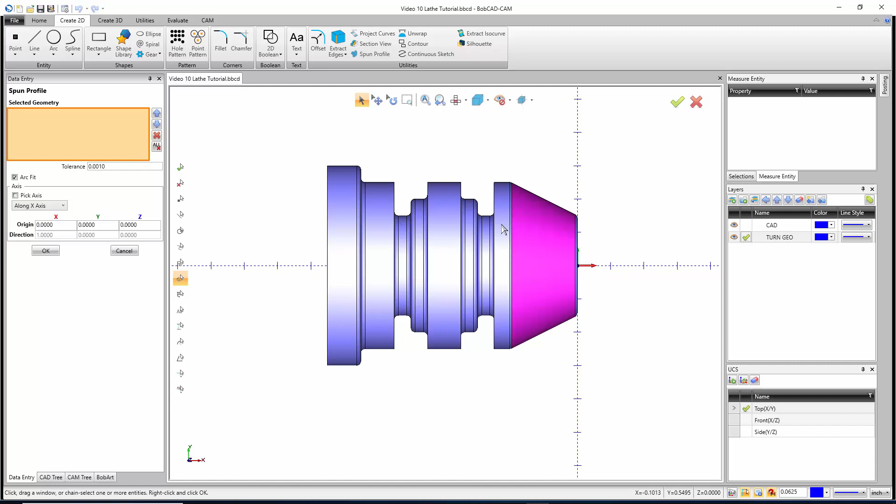Now, if you are just turning, so you don't think with the coordinates of X, Y, Z, and you think of it more as X and Z, under the Home tab here, you can turn on turning mode. And what you'll see is down here at the bottom, the screen will change to Z and X instead of X, Y. So that's a good way of just keeping it in turning mode so you're always thinking with your Z and your X properly.

I like to just leave it off because most of the stuff I do, I'm just drawing it in the XY plane, and when I machine it, it'll all be in the XZ plane anyway. So for me, the center line of the part is along the x-axis. So I want to go along the X for my direction. The tolerance is the allowable deviation. So it's kind of the quality of the part, and I'm going to leave it right there at 0.001. And then the origin is XYZ 0, and I have my part centered right on that.

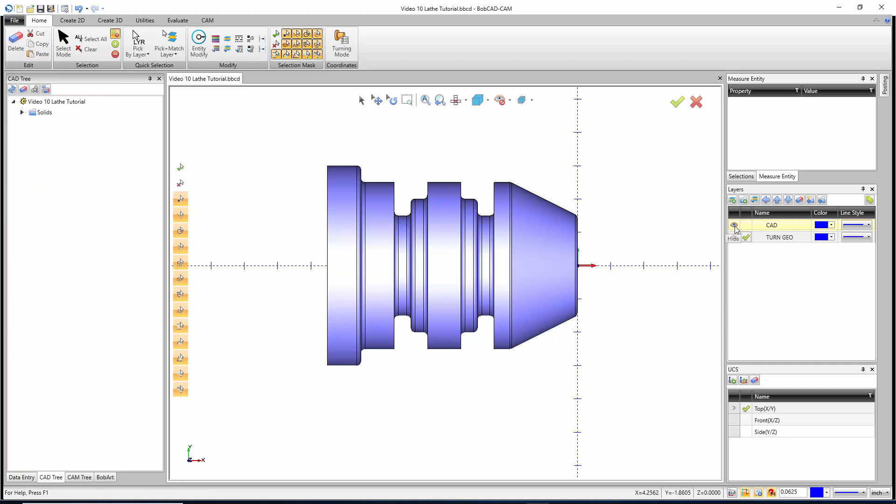So now all I have to do is drag a box over the whole part and then hit OK. And when I'm done, I can cancel out and then turn off the CAD layer over here. You're just going to click the eyeball, and I'm left with that geometry. So down the middle, we have a 1-inch hole, and then we have just some turn geometry and some grooves that we're going to have to cut in.

So I'm going to start by going to my CAM tree. I'm going to right-click on CAM defaults and say New Job. And from here, I'm just going to choose Turning, which will choose the BC2X lathe. And I'm going to go to the Stock Wizard. Now for the Stock Wizard, I'm just going to hit Next. And so the way I like to figure this out, it does not automatically calculate a size of stock. So what I do is I look at my XY position.

And if I bring my cursor to the back corner of the part, we can get a pretty good idea of how big this part is. So right here for X, we'll see it's 7.49. So it's about 7.5 inches long. And for Y, it's 3, but remember, this is just the radius. So the stock diameter is going to be closer to 6. So we'll say it's a 6-inch diameter, and we'll say that the length of it is 8.5 inches, just like that.

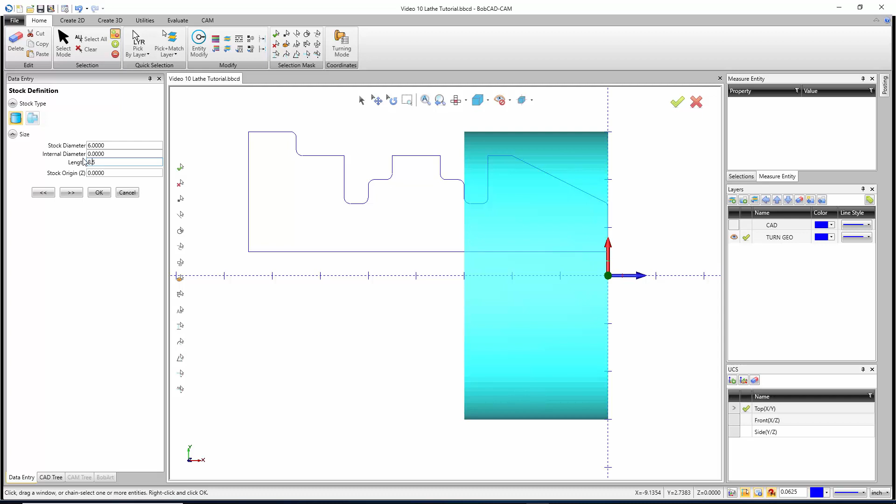Now, if we have material on the front face of the part that we want to take off, what we could do is right here where it says stock origin, we could put in, say, 0.1, and that's going to shift the whole stock forward. So it's still 8.5 inches long starting out, but we're going to take off that 100 thousandths and then be able to do the rest of our cuts.

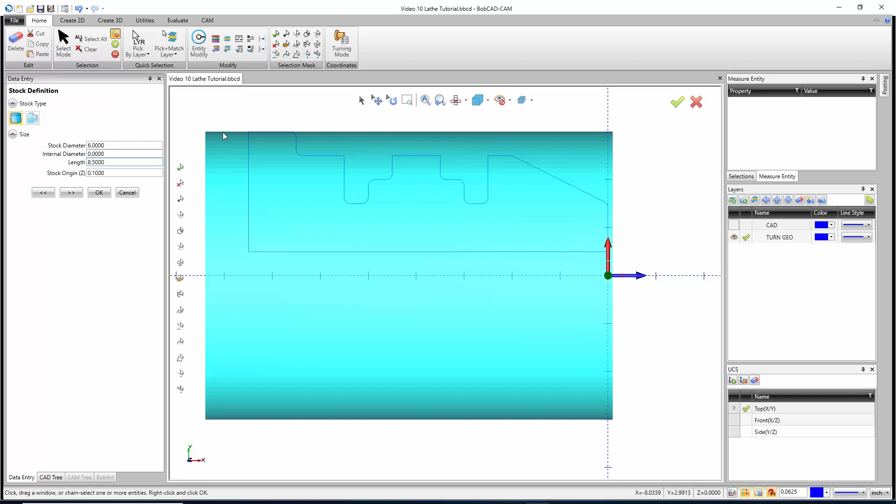Now, if we go ahead and hit the next arrow, this is where we set up our clearances for turning. We have our face at 1 inch, our diameter at 1 inch, and our internal diameter at 50 thou. So what that means is from the face, whenever we do clearance moves, it's going to go 1 inch away. From the diameters, it'll be 1 inch away, and from any ID work, it'll drop 50 thou and then come out. So when we're done, we can hit OK.

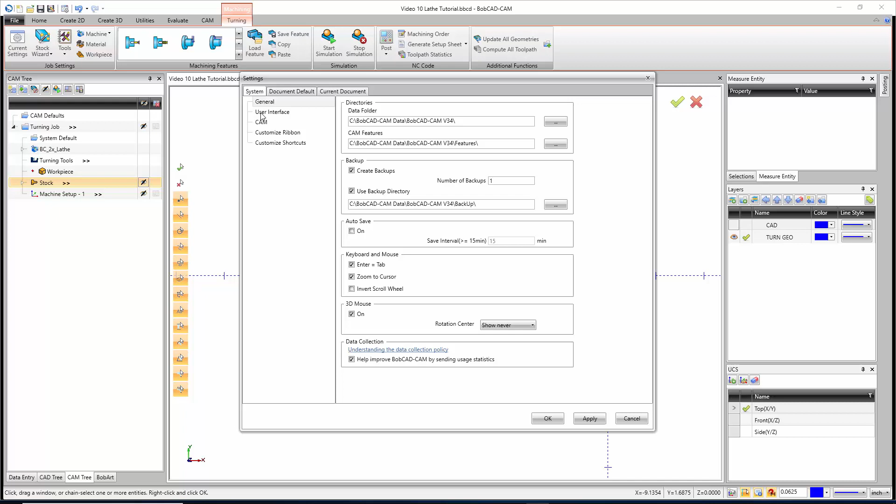And I have the setting on automatically that blanks out the stock. It's under the settings here. You go to settings, and then under system go to CAM, and it's auto blank new items. It's going to blank out anything new that you create, stock, toolpath, all that stuff. So now I can actually get into the toolpathing part of this. But before I do any toolpathing, one of the best things to do is set up a tool crib so you have defined tools. So I'm going to right click on turning tools and say tool crib.

I'm going to start by clicking on Lathe Rough, and I'm going to add from my tool library. I'll choose my CNMG with a 64th radius, hit OK, and there's the tool. Then I'll pick up a finisher, so add from the tool library. This time it's going to be a VNMG with a 64th radius, and again I'll hit OK.

There we go. And then we do need a center drill and a drill. So I'm going to do a center drill, add from the tool library, and I'm just going to use my 1/2 inch 90-degree spot drill, hit OK. Then for the drill, it has to be a 1-inch drill that I'm going to run through here, just a quick drill, so I'll say add from tool library.

Now the big thing here is the length. We need it to go 7.5 inches, so it's a pretty long way, and we might be boring that instead. I'm just going to drill it out, but we might have a smaller hole drilled through and maybe bore to clean everything up, maybe we hit it from 2 ops. But for now I'm just going to say we're doing it with an extra long drill. So I'm going to go down and find my 1-inch drill. There it is, we'll see the flute length on it is 6.375. So it's pretty close, but I can actually modify that now.

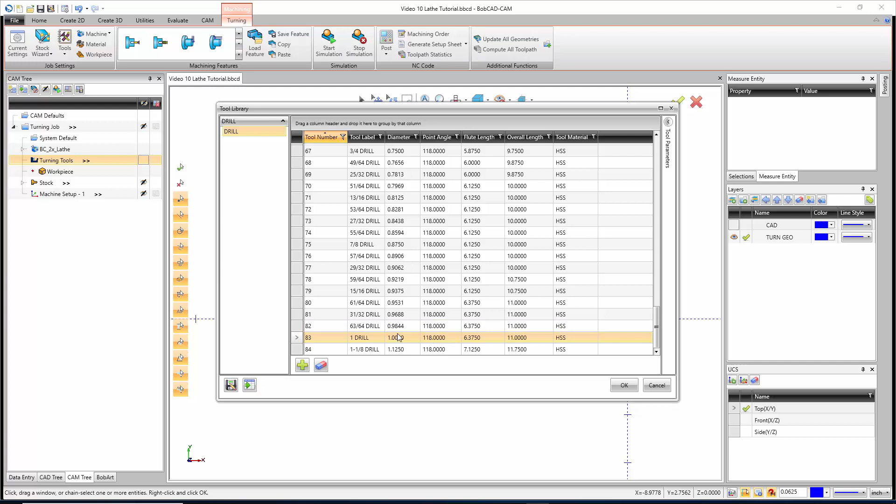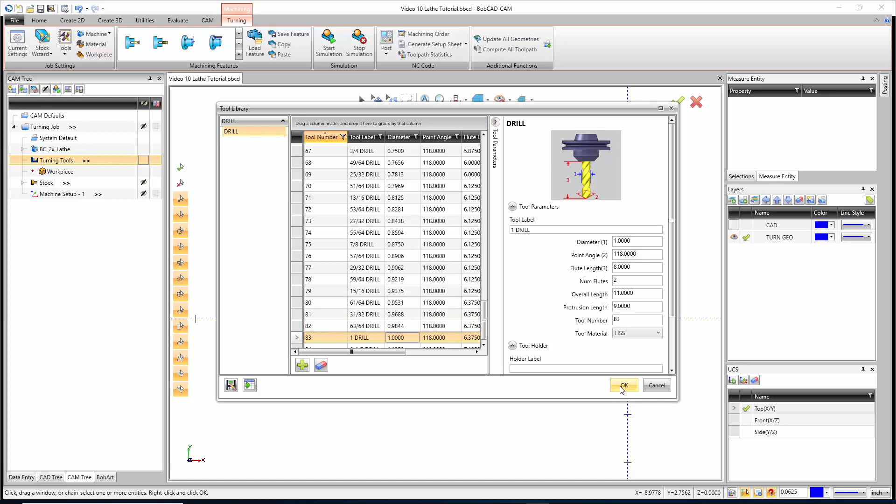If I just double click on that tool, I could go in and say that the flute length is 8 inches and the protrusion length is 9 inches. So now I know I have enough to get all the way through. Now we also have our tool material. If this is a high-speed steel drill, you could leave it there, or you could change it to carbide or even an inserted drill. I'll just leave it on high-speed steel for now. And then I'm just going to click on the tool and hit OK. And there is my extra long drill.

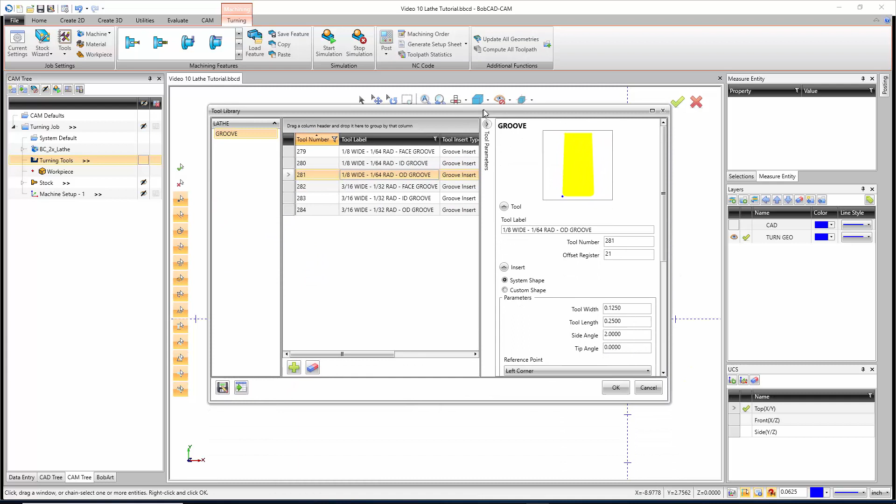And then the last tool we really need to add is going to be the grooving tool. So I'll say groove, add from the tool library, and I'm just going to go ahead and pick my 1/8 inch wide OD groove here. Now again, if we open this up, the one thing you want to pay attention to is if the depth of your groove, which we can't see there, if the depth of your groove is kind of deep, you need to make sure the tool sticks out far enough to reach it. And you might need to get a custom holder for this.

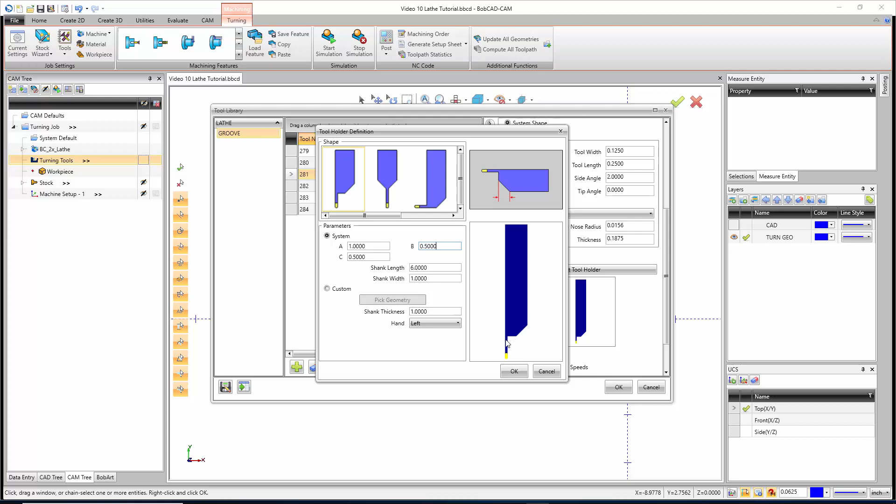In this case, if I go to edit tool holder, I could see that the total length of stick out is 1/2 of an inch. This depth that I need to go for my groove is about 3/4 of an inch at the deepest point where we need to clear geometry. So I'm going to say that the stick out on this is actually 1 inch, so it just makes it stick a little bit longer. And then that way I don't have to worry about the tool hitting right there. So when I'm done, I hit OK, and then I'll hit OK once again, and now I have my grooving tool in there.

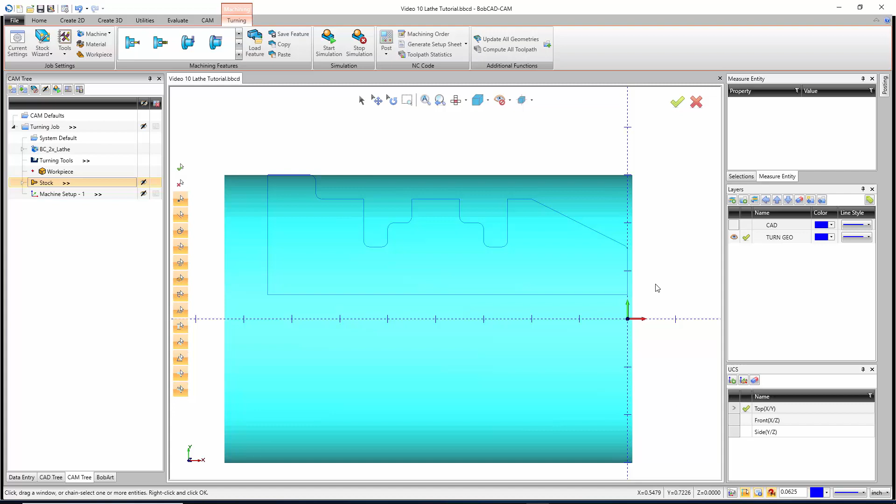So that should be all the tools we need. Now we hit OK, and then to get started, because I left that geometry in front of the part, we need this geometry here for BobCAD to recognize that there's material that needs to be faced off. So if I go to the machine setup and right click, the first toolpath we're going to use is the lathe end face, so I'm going to pick that. Now where it says select geometry, you could go in and pick your geometry. With the lathe end face, you pretty much don't, but I do like to go in and pick a line. But if you didn't have a line that was right on the face, this is just recognizing the amount of material until the geometry starts.

So anything in front of the part - our rapid plane for multiple passes is going to retract to 200 thousandths. We're using the front face, which we can't change because this is a facing feature. And region 1 means we're going from the OD to the ID. Region 2 would let us go from the ID to the OD. So I'm going to go ahead and go region 1. I want to go from the stock, so it's recognizing the area of the stock that needs to be machined. And then right here we have extensions. Extensions allow us to start a little bit before the actual material and then kind of go past the center. So for the start, I'm going to go 1/8 of an inch.

For the end, I'm just going to say go 1/16 of an inch past center so we can get rid of the little nub that's left at the end of the part.

Next, we then have our machining strategy. Now, this is just a facing pass. I'm not too worried about the finish we get here. It's going to be pretty good, but I don't need to run a finish pass. So I'm just going to run the rough, which is the default.

Right here for the posting page, we have separate moves or canned cycles, and this just depends on your post processor. If you have canned cycles defined through your post, you can feel free to run canned cycles. Otherwise, just run separate moves, and it'll be separate moves through the code.

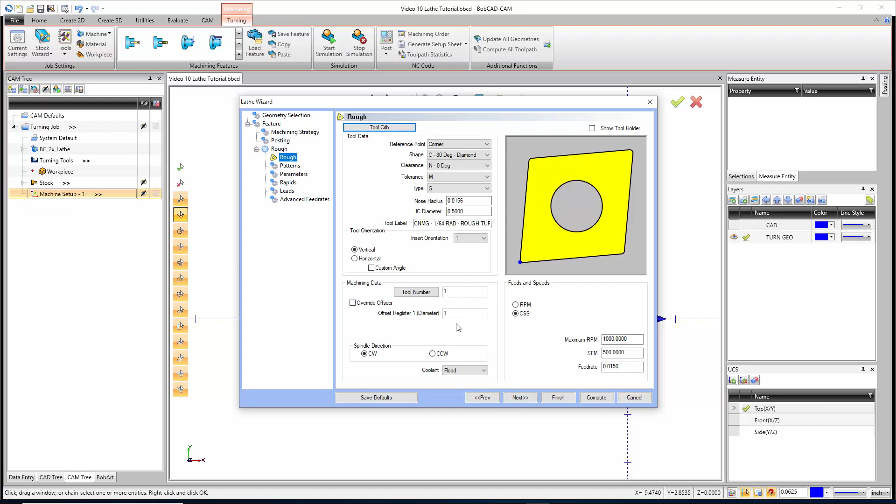Right here is where we get our tool. We'll see it's tool number 1, which is the CNMG. That's actually the right tool, that's the one I picked. We could show the tool holder to see what it looks like, and we could also modify the tool if we needed to. If we were maybe thinking we didn't want to use a CNMG, maybe we wanted a VNMG, we can change that right here on the fly. But since I already put one in my tool crib, I'll leave it there.

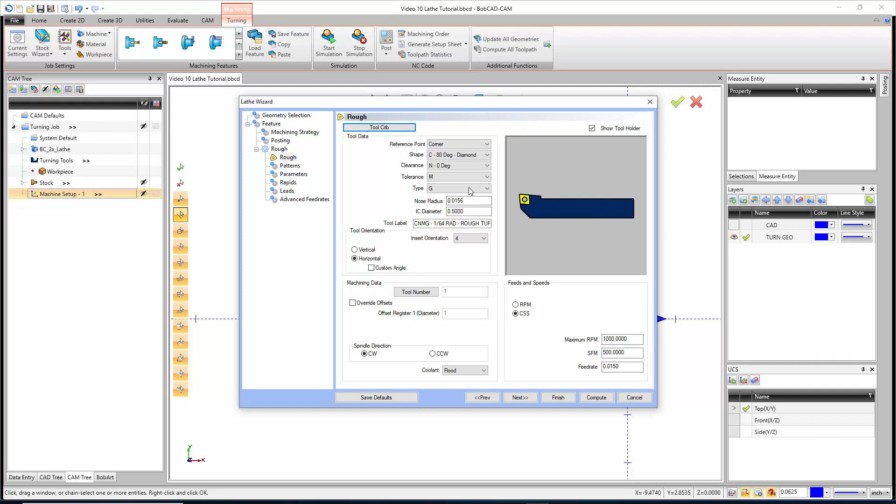The tool orientation, you have different orientations for how your tool sits. Now there's vertical, and then you have orientations 1, 2, 3, and 4. And then you have horizontal, which gives you 1, 2, 3, and 4. So if you're looking at these kind of things, like this would be good for an ID bore, to go in and clean up a bore on your ID. But for us, we're going to go with vertical, and we're going to go with orientation 1.

Now right here we have our tool number. That's just the number that it is right now in the system. We can change that later on, but we're going to leave it right now. We got our spindle direction, clockwise or counterclockwise, our coolant type - so we have flood, mist, air, or oil. And then we have our feeds and speeds. We can go with either RPM or constant surface speed.

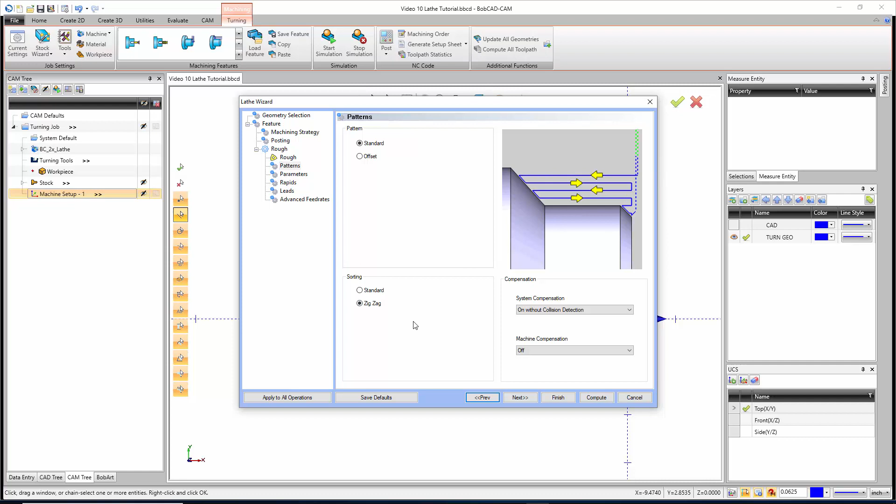So we'll go next. Here's the patterns. So there's kind of two patterns on here. You have standard and you have offset. Standard's going to start at the beginning and make a straight cut and then come back and make another straight cut. Offset is going to use the shape of the geometry for its cuts into the part. We also have some sorting options. So standard is going to keep everything moving in the one direction, and zigzag is actually going to zigzag its way down the part. This one you'd have to be careful with - you have to have the right kind of tooling to do that. So I'm going to go with standard and standard.

And then right here for compensation, because I'm defining a tool and I'm not lying about the tool, I trust that the holder and the insert that I have selected are going to be the holder and the insert that I have at the machine. So what I can do is either apply machine compensation and apply G41 or G42 myself, or I can let BobCAD compensate for the tool by just saying on without collision detection. If I also want to avoid the holder touching the part, I can say use the tool holder. So I'll go ahead and say next.

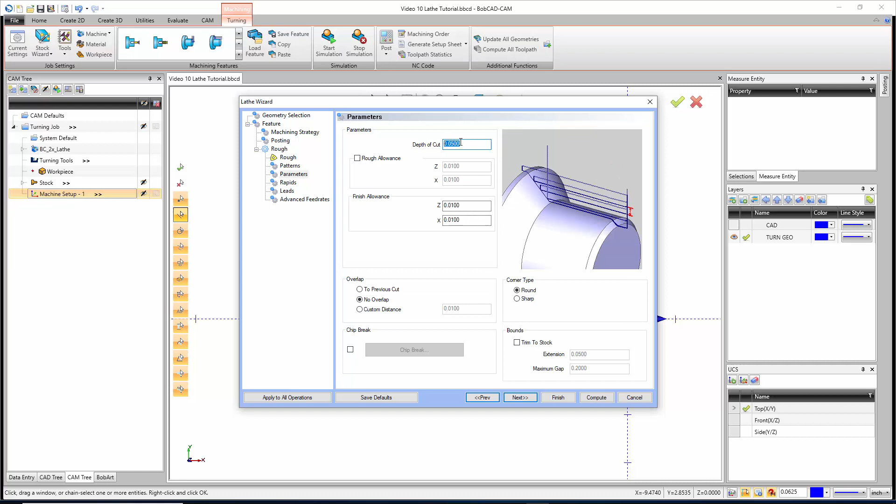Right here for the parameters, we're just setting up our depth of cut, and I'll leave that at 50 thou, that's fine. And then right here we have our allowance that we're leaving for the finish cut if we were to do a finish cut. So this is the value we need to make sure is set to 0 so that we actually finish to size. Now right here we have no overlap selected on a face pass. I don't need these passes to overlap to where the previous pass was or a custom distance. When we do a turn rough and a turn finish, I will have them go to a previous cut so that we can knock the steps that are going to be left in the part down. But this is just a face pass, so we don't have to worry about that.

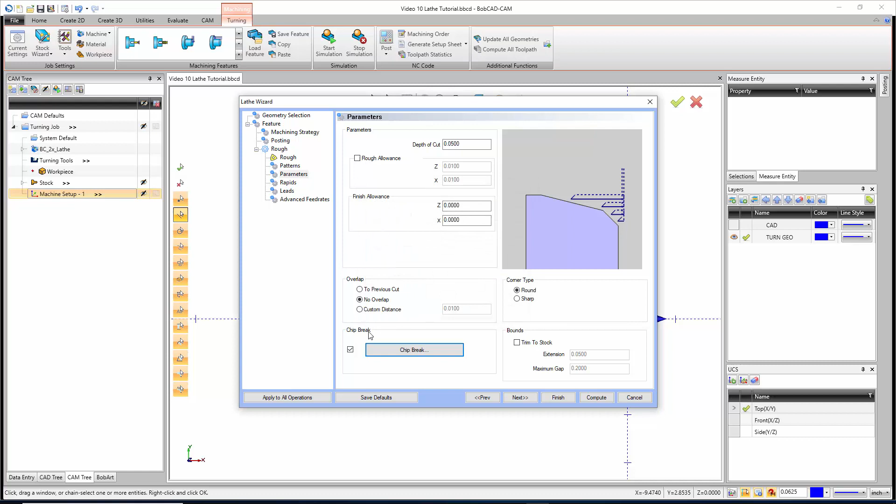We have our chip break settings, so it's based on either a length of cut, a set time, or a length of chip. And you could say every time we hit a 1/4 inch length of cut, retract to whatever distance we say, and that'll break the chip, and then you can continue cutting after that. I'm not going to use any chip break right now. Right here we have our corner types as round or sharp, and really this just changes how we interpolate the corner, whether we use an arc move in the code or whether we just do 2 line moves.

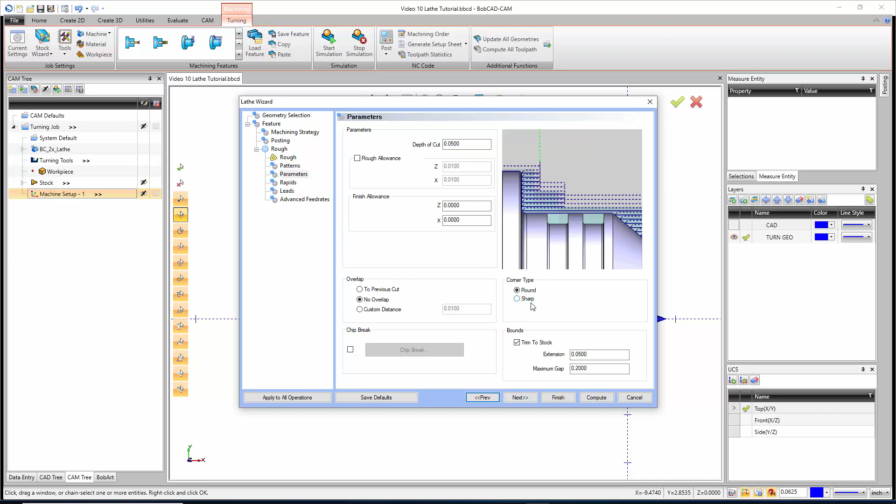I'm going to leave it on round. Right here's an option called trim to stock. Trim to stock basically allows you to bring in another stock model that may represent the geometry left after another job has already run. Maybe you've already turned this on a different machine, something came up, you had to take the part off and run it on another machine. This would let you pick up where you left off, but you'd have to draw whatever result you still have.

If there's still material you need to take off, you'd need to draw that properly. Next we have our rapids page. We have our default rapid on the approach and our default rapid on the exit, and that's a pretty good starting point for most things other than setting up your home position. But if you need to take control, we have going from the ID, OD, or face clearances, as well as defined points. Same with the exit. Where do we return to? We can go to the tool home, the cycle start, or a defined point.

Now you'll see this X-Z, or Z-X, or just ZX. What that means is X is going to move before Z, or Z is going to move before X, or it's going to be an angle out. This is really the option I change if I change anything on this page, and it's usually when I'm doing ID work, because I want to ensure I exit a little bit on my X, get in my rapid plane, then go Z first, and then back out with X. So if I was on an ID bore, I'd go with the ZX option. But in this case, I'll just use the defaults, since all the stuff we're working on is pretty much outside the part.

Right here we have our leads. So we have parallel, perpendicular, horizontal, vertical, angled, or custom, and we have those same options for lead outs. I try to avoid changing the leads if I can. If I see a problem with a lead when I run my simulation, I will come in and change them, but for now I'm just going to run the defaults.

Right here we have our advanced feeds. So convert rapids to feeds converts the G00s in the program for this tool path to G01 moves, so you don't dogleg rapid. And then we have lead in and lead out feed rate percentages, which is a percentage of the cutting feed rate used just for leading in and leading out. When we're all done and can't hit next anymore, we're going to say finish.

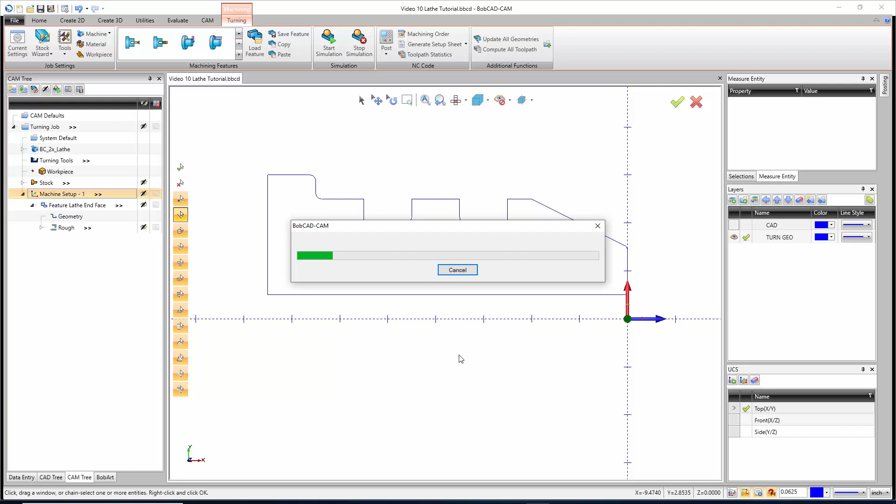And there we have our facing pass. Mine's already blanked out, so all I got to do is shrink it up, and there it goes.

Now the next step I'm going to do is drilling the hole. I want to do that while I have all this meat on here, so I just want to drill the hole down the middle. I'm going to right click on my machine setup 1 and go down to lathe hole, and then I'll select the geometry. All you're defining when you're drilling is the stop point. So I'm going to go back to here and hit OK.

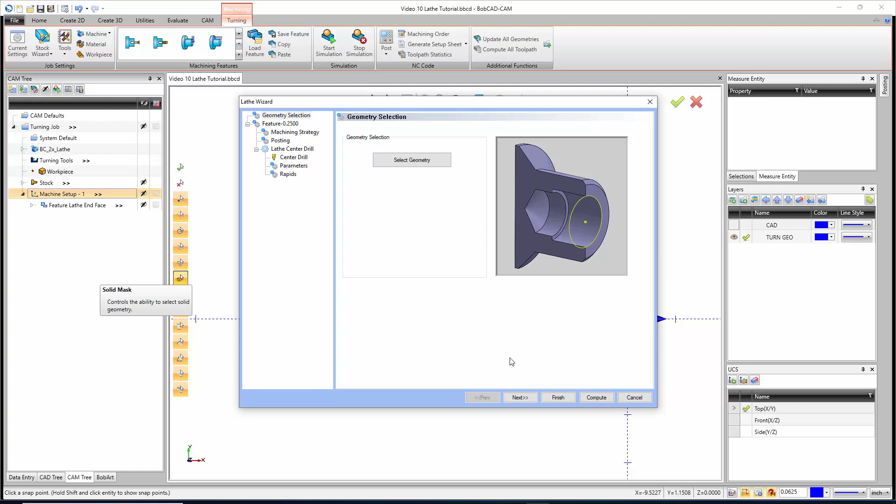Now it doesn't care that it's on the x-axis at all, it's not reading the diameter. We have to tell it the diameter of the hole, so we're going to say it's 1 inch. Top of feature is at 0, or the front face of the part now that it's been faced off. And we want to go to its total depth of 7.5 inches.

Right here we have our hole type, and if we leave it on through, we're going to add 50 thousandths to the depth of the hole to ensure we go past the edge, plus we're going to add the tip angle on. So right now the total depth is 7.5. When we see it on the drilling page, we'll see 2 other numbers: one is going to be 7.55, which is the added 50 thou, and the other one's even larger, accounting for the length of the tip of the tool. I'm going to leave it on through, but if you didn't want to add the extra 50 thou, leave it on blind.

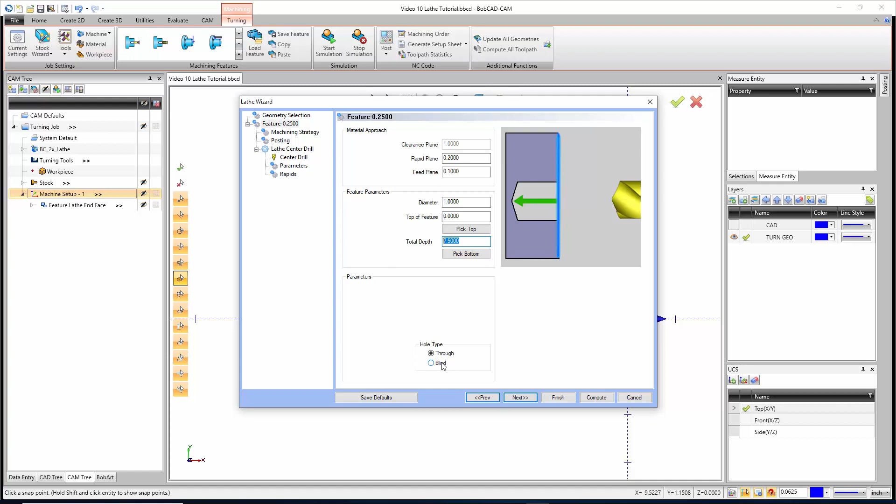And I'll go next. Right here for the machining strategy, I'm going to go ahead and choose the lathe hole option, which gives me a center drill and a drill, but if I wanted to, I could also bore or ream this out. Right here we have our posting, again, separate moves or canned cycles, just depending on your post. And right here we have our center drill.

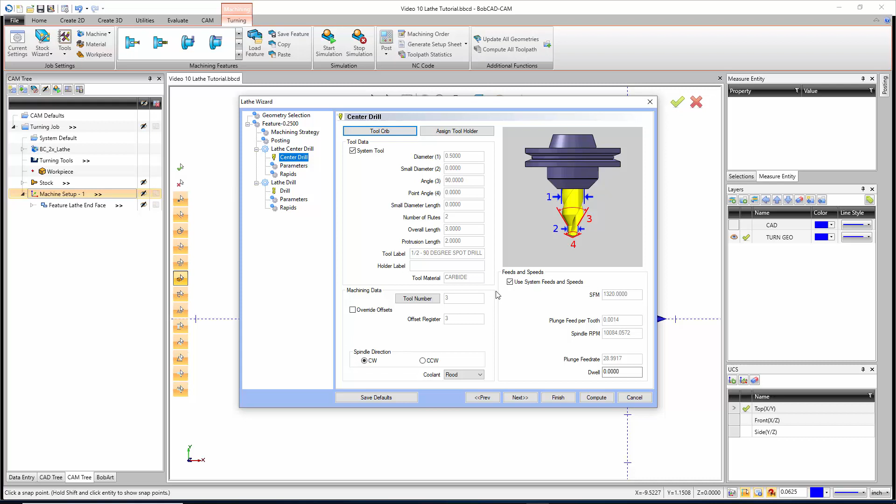It's my 1/2 inch 90-degree spot drill. It's the tool that I picked earlier. We'll see it's tool number 3. We have our spindle direction, feeds and speeds, so we'll go next.

Now for a center drill, you can choose either the depth you want to go, or you could tell it what you want the center diameter to be when you get to a specific depth. So I'm going to go in and say I want the center diameter to be 1/4 inch, which means I need to drill an 1/8 inch deep. And I could choose to peck this out if I wanted to. I'm just going to say single depth and next.

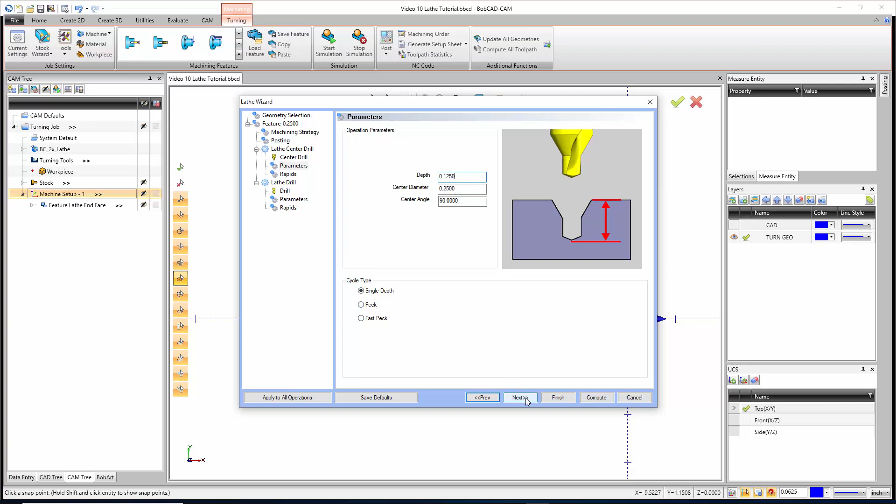And again, with the rapids, we have the default rapid on the approach and the default rapid on the exit. And again, I like to use the defaults. You might need to adjust the home positions for your tools, but try and use the defaults if you can. If you don't see any issues, it's probably good to go.

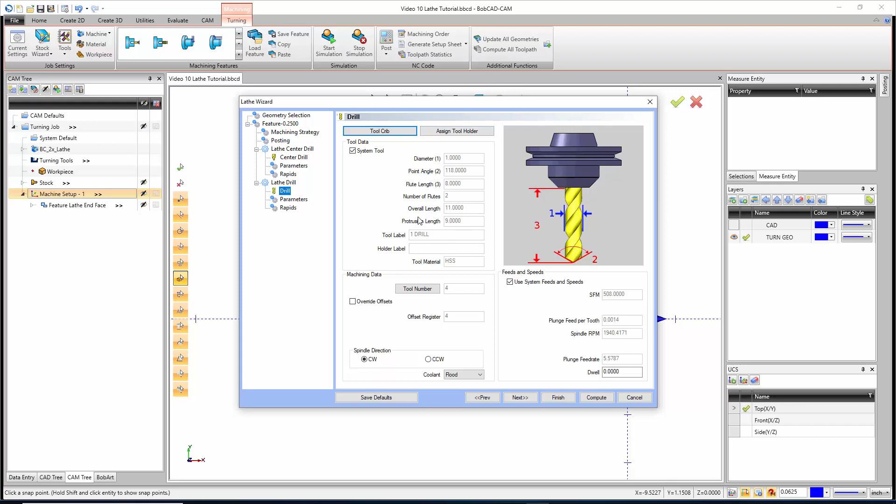Right here for the lathe drill, we got our 1 inch drill. It's the one that I changed the size of earlier, so we have enough length sticking out of it. We'll go next again. Now this is what I was talking about earlier.

So the effective depth, the depth at which we are going to get a full 1 inch wide cut, is going to be 7.55. But the overall depth, and this is the number we're going to see in the code, is going to be 7.8504. And that's going to account for the 118-degree tip on the tool to ensure that we get an effective depth of 7.55. If you ever change this, you just uncheck the use cutting conditions and make your changes.

Right down here, I'm going to go ahead and do a peck. Now, when we do our peck by default, up in the settings, we can actually change it under the cutting conditions, but there's a peck increment percentage, and it's a percentage of the tool diameter that's used to calculate the peck amount. In this case, it's set to 50%, so it's a 1/2 inch per peck.

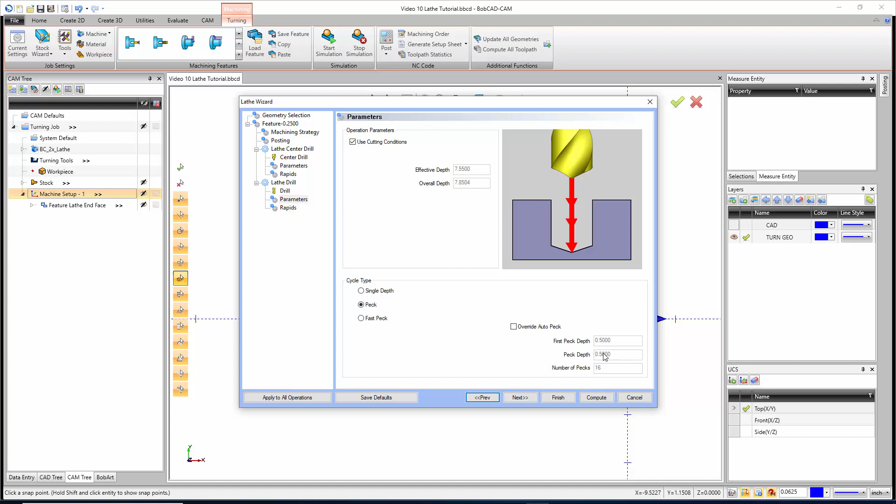Next, we have our rapids, and I'm going to use my default rapid on the approach and my default rapid on the exit once again. When we're done, we can hit compute. And that one's going to be a quick one. There's our center drill. It stops just right there. And then we have our drill that goes all the way through the middle.

Now the next one we're going to do is the outside cut here. We're going to rough all this in, but we're going to ignore the grooves because I want to do those as their specific grooving. So I'll right click on machine setup 1.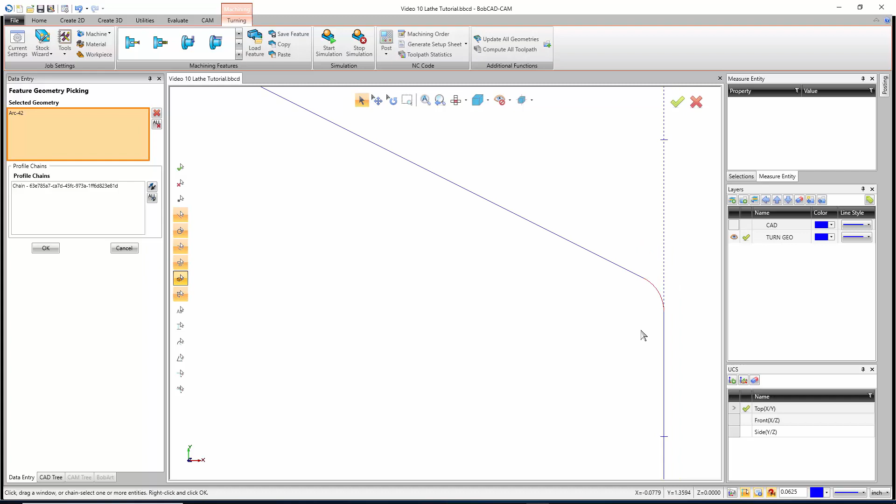We're going to go down to lathe turning and then select our geometry. And this is going to go from this front arc. So we want to click on that. And then we're going to go all the way back to this back line right here. Now, the way that we get these 2 clicks to chain together is by finding the midpoint on this final line and going past it. Then we can hold shift and click, and it'll chain select between those 2.

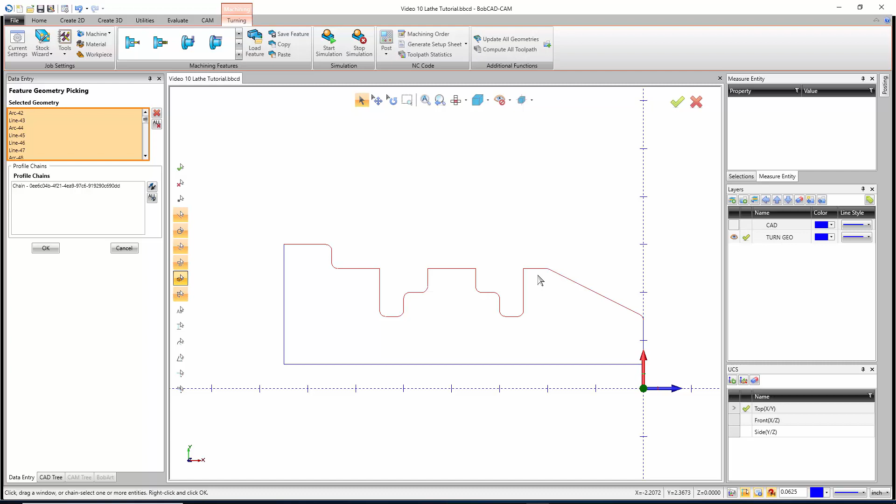In this case, we could have also dragged a box, but be careful dragging boxes because if there's any duplicate geometry, it will pick that and could screw up the toolpath. So we'll go ahead and hit OK.

And then hit next. Right here for the feature, we have our rapid plane at 200 thousandths. We have our feature type, so we have a choice of OD, ID. We could do a front face or we could do a back face. Now the regions that are down below are kind of which side of the part are we working on, or really which direction is the tool facing.

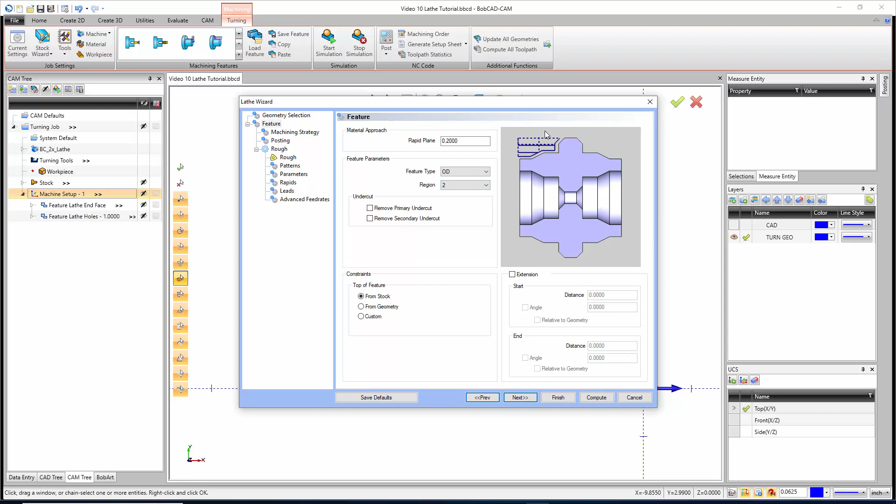So OD1 is the orientation we need for our tools. But if I said region 2, then it would be taking my tool and flipping it 180 and coming in this way to machine that part. Same thing happens with the ID and as well as the front and back face. But for this one, we'll go with OD region 1.

And right here we have undercuts. Now, undercuts are the grooves that are in the part. Now, a primary undercut is a turn groove. So this is telling the software to ignore any turn grooves. A secondary undercut is face grooves. So this would tell it to ignore any face grooves. And if you have them both turned on, you're ignoring all grooves.

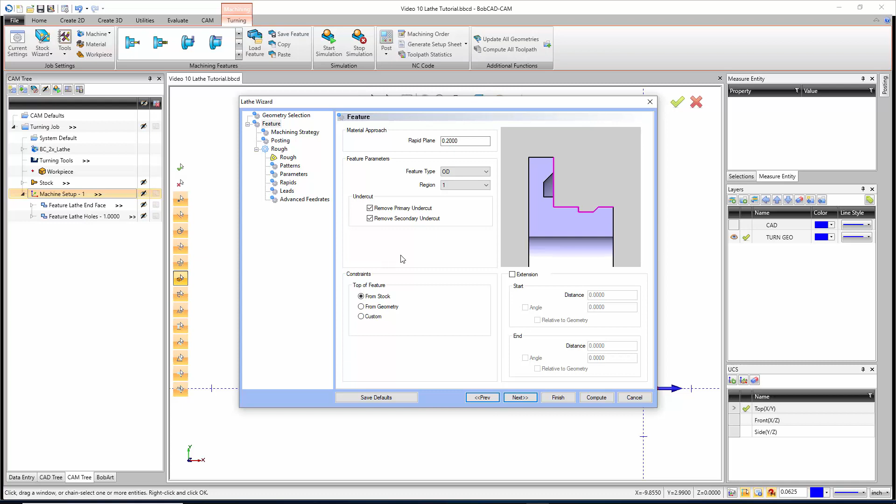Now, since this is kind of my initial rough pass for most of the material, I tell it to go from the stock. So it recognizes where there's stock around the geometry that I selected. Right here, we have some extensions.

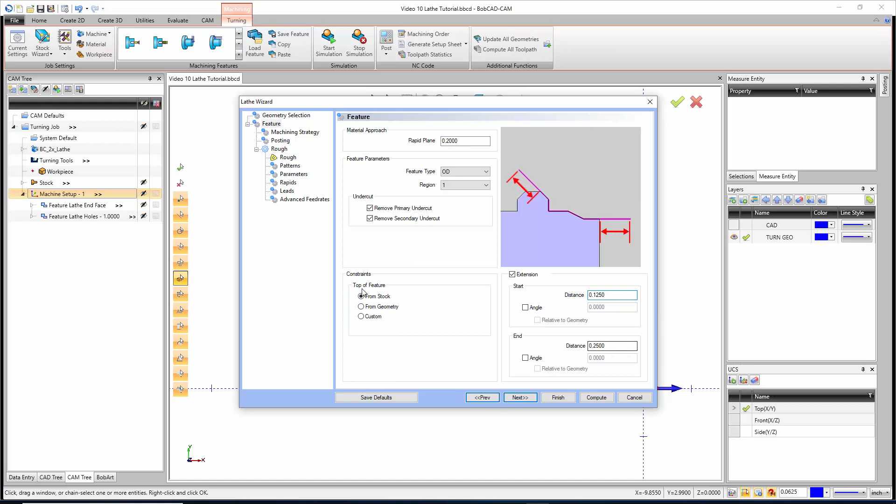So again, extensions allow us to start a little bit before the part and a little bit after the part. So for my distance on this, I'll go with an 1/8 inch before. And I'm just going to do a 1/4 inch after, because that's going to allow me to get a better cutoff later on, which I didn't add to the library, but that's a pretty easy tool to pick.

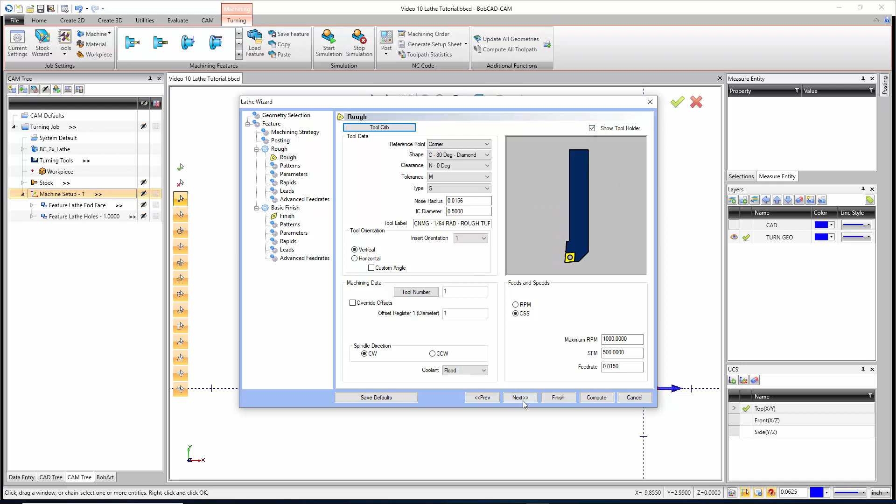Right here for the strategy, we're going to go ahead and choose the rough/finish option, which is going to allow us to rough the part and finish the part. So we'll go next. Posting, again, separate moves or canned cycles. For the tool, we're going to use that CNMG, the original tool we used, so tool number 1. We'll go next again. For the patterns, we have our standard cut or the offset cut. This is the same exact tool path as what we got when we saw the facing portion of the video.

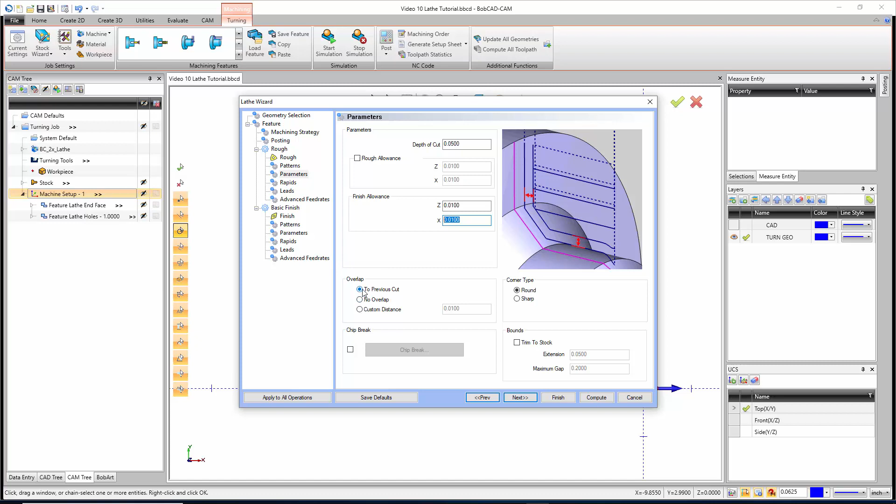So I'm just going to go and say on with collision detection, but use that tool holder so I can avoid any collisions. For the parameters, I'll do 50 thousandths for the depth of cut, and 10 thousandths is what I'm going to leave for the finish pass. Now again, the overlap amount is where we overlap to after we finish our cut. So we're going to finish a cut, and instead of it actually leading out right here, it's going up and leading out at the previous cut so that we can get rid of any steps that are left on the part. Other than that, we have our corner type, our chip break, and our bounds.

No changes there. For our rapids, again, I'll just use the default on the approach and the exit. For the leads, I'm just going to go with a parallel lead in and an angled lead out, and I'm fine with the 100 thou distance and the advanced feed. So again, convert rapids to feeds or change your lead in and lead out feed rate percentages. Now for the finish tool, you'll see it automatically grabbed my VNMG, and that's because that tool is in the system. I put it in there myself so it knows that it's there.

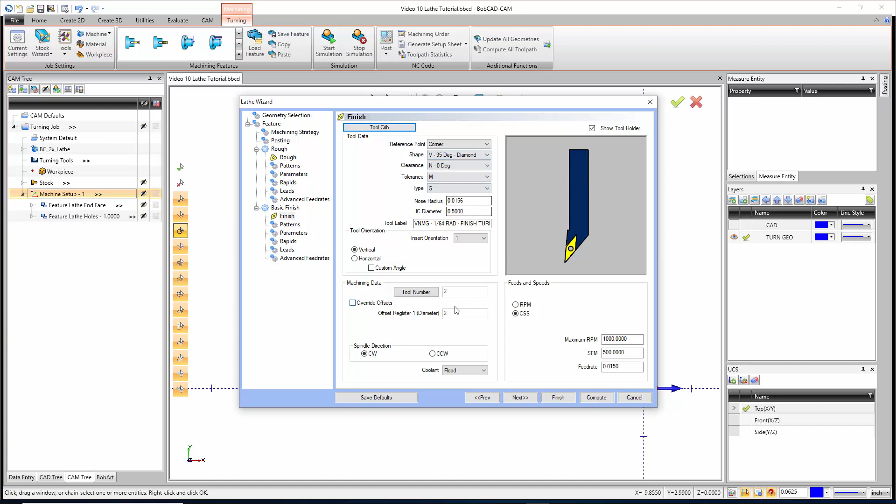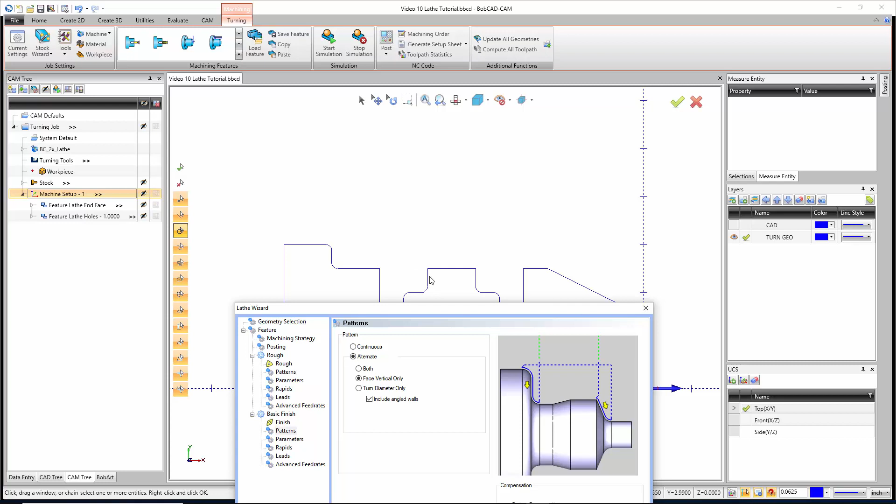Right here for the patterns, we get 2 patterns for this finish pass, which is a continuous cut. So it's going to start at the beginning and machine all the way to the end. We also have alternate, which gives us 3 options. The first option would be face vertical only. So this is going to go in and just face the vertical pieces of geometry, which isn't much on this part, but it's facing them backwards. So it's dragging down, to eliminate that rat's nest that can build up.

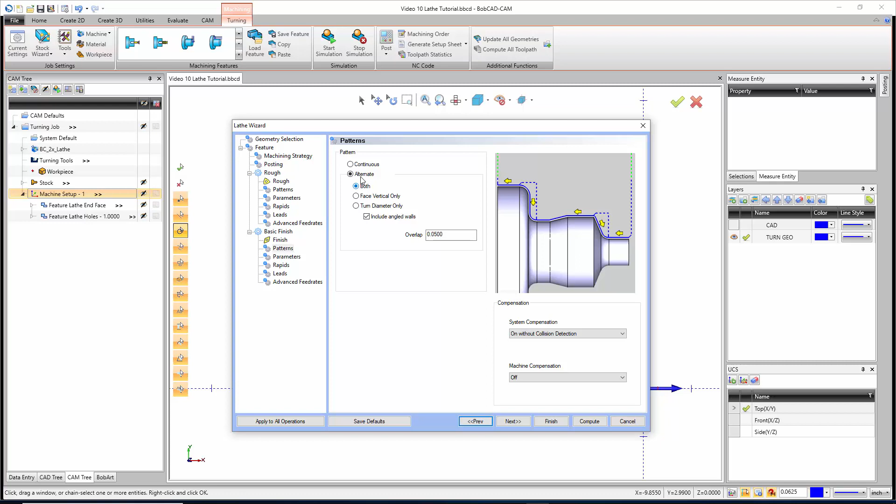We also have turn diameters only. So it's going to go from the front to the back in the normal direction, but only on the turns. It'll actually ignore any of the vertical cuts. Or you can do both, and it breaks it into each individual segment. I'm just going to go with a continuous finish, and I'm going to say on with collision detection using the tool holder. For the parameters, there's not much to do here.

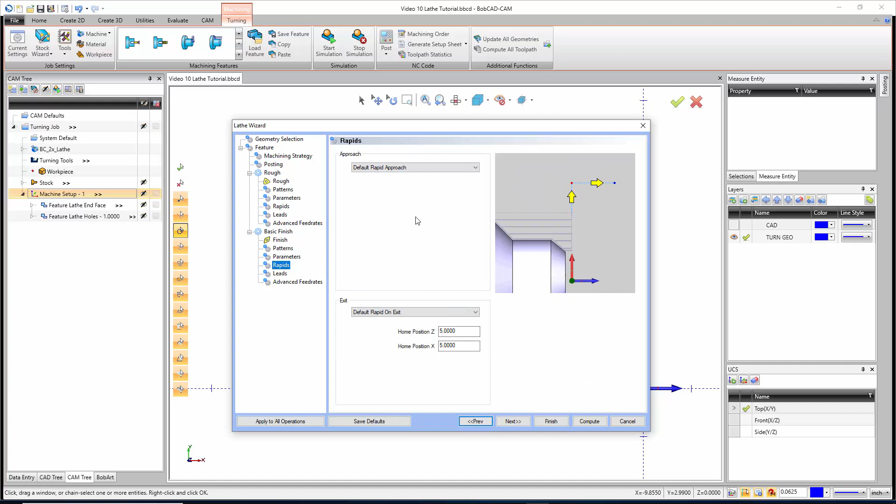We just have a finish allowance, and this would be if we were going to come in and finish this again, then we'd set up a little allowance to leave material. Other than that, we just have the chip break, the corner type, and the bounds. No changes there. For the rapids, again, no changes. Leads, go with parallel and angle once again. And then the advanced feeds. So convert rapids to feeds, lead in, lead out, feed rate percentages. When we're all done and we can't hit next anymore, we're going to hit compute.

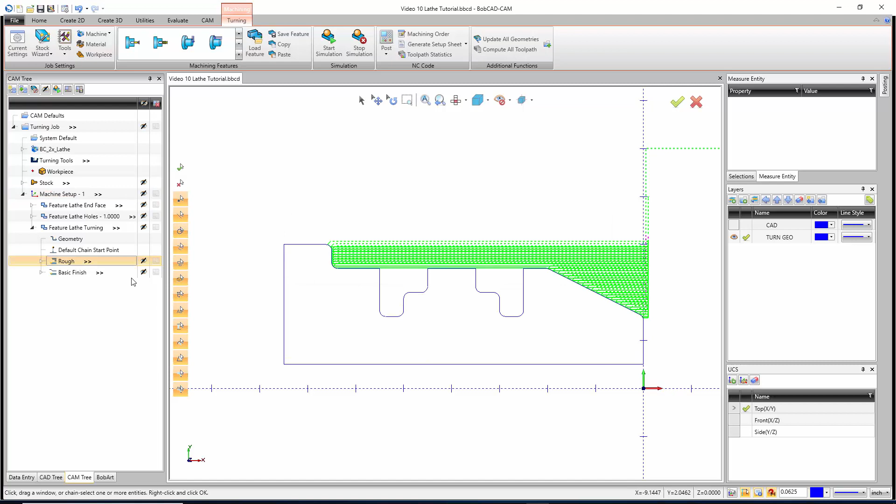And so there is the rough pass. So it's going to go in, just take a bunch of material out there. And then we have our basic finish just going in, making that cut. So now I'll go ahead and shrink that up. Right click on machine setup 1. And we're going to go ahead and choose a lathe groove this time.

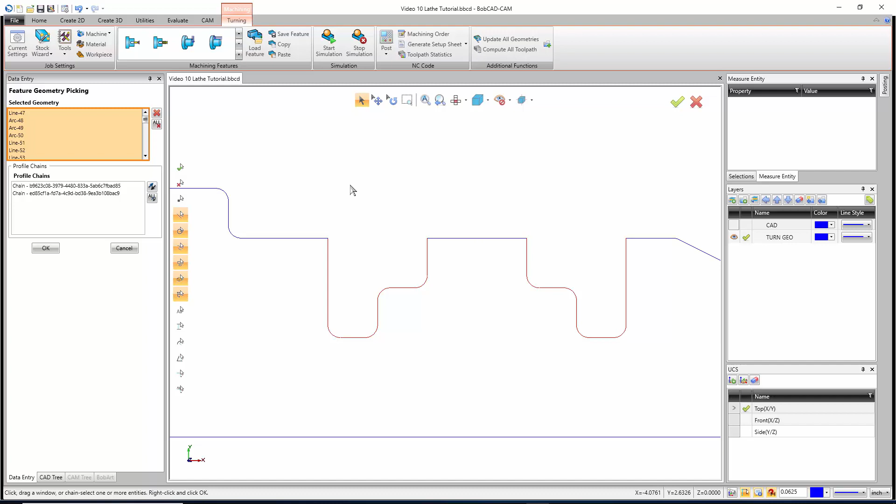So for the geometry on this one, you can actually drag a box, just don't drag too much of a box. I only need to drag a box that starts about here, goes across the whole part, down to cover all that. We don't want to select the geometry that's connecting them together. So we'll go ahead and hit OK, and then go next. Right here for the feature, we have our OD region 1.

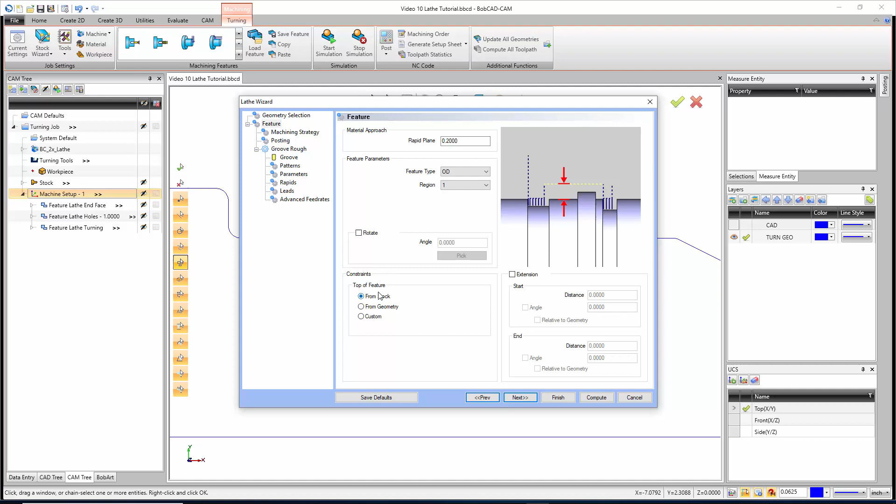And if your tool and your groove are on a specific angle, you can actually set the grooving tool to that angle, and then you can tell us what the angle is, and that way we know to go into that the right way. Now for the constraints, from stock would start it at the original stock height. So we'd be starting all of our grooving from here, but all this material's gone. So from geometry goes from the height of the highest point of the geometry selected and then cuts its way in.

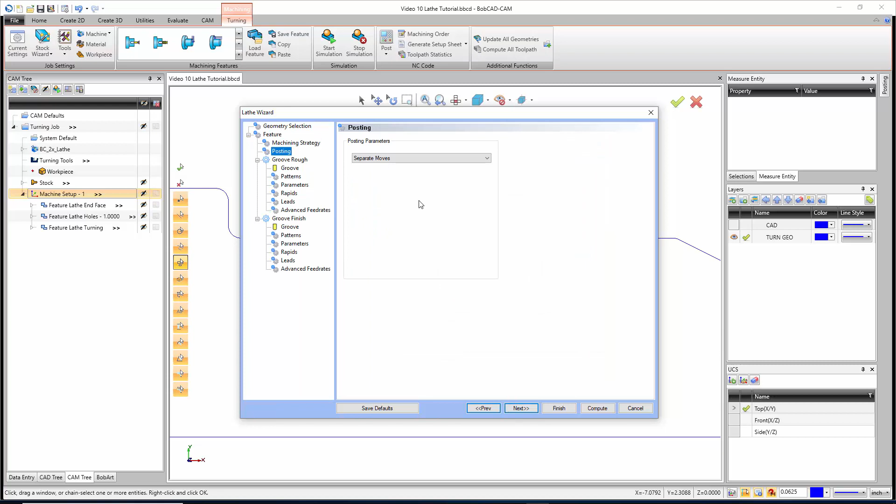I'm not going to do any extensions on the groove this time. For the strategy, we'll go with groove rough finish. Here's our posting, again, separate moves or canned cycles.

Here's our grooving tool. I like to turn on the tool holder to make sure it looks right. If you're not sure, go up to the tool crib, go to groove. If you've set up a tool, it's going to show up in here. You could also use your cutoff tool if you wanted to. I'll go ahead and hit OK and then next.

Here for the patterns, we could choose either a standard cut where we basically cut as many times as we need to cut it out. Below here we have our sorting, and this all goes towards standard. So it's kind of what order do we go in? Do we just make one cut and then move next to that, next to that, and keep moving? Or do we go center out?

So we start with the center of the groove and work our way out from there. Center out alternate is going to do the center and then one side, then back to the other side, then back to the first side, and back to the second, depending on how many cuts you have. And skip is actually going to skip one. So we make our first cut, skip a pass, make our second, skip a pass, third, and then go back and clean up the areas we skipped.

We also have single pass, which allows us to go with center, beginning, or end, and all these options are used if you had a single press kind of groove, where you're using a tool with a specific shape that creates the groove you need, just presses in and then leaves. And then we also have zigzag, so you can zigzag your way down into there.

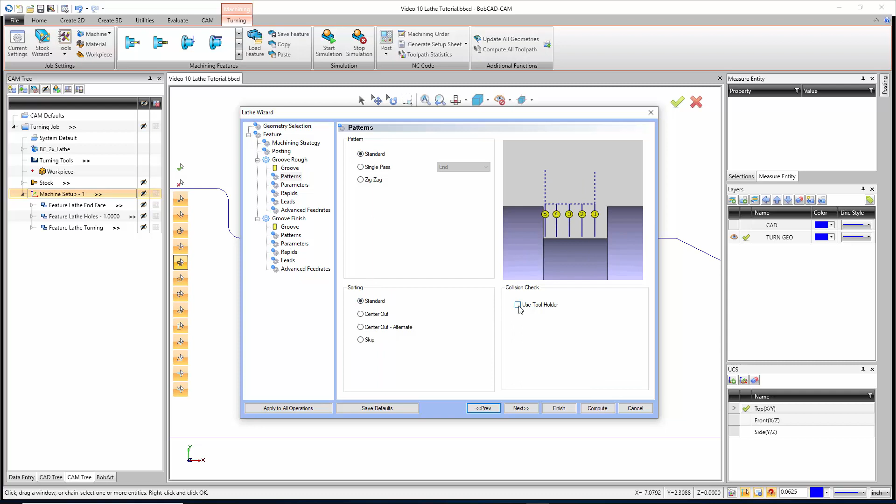I'm going to go with standard and standard sorting. And for the collision checking, I'll tell it to use the tool holder. We don't have the tool compensation for this one.

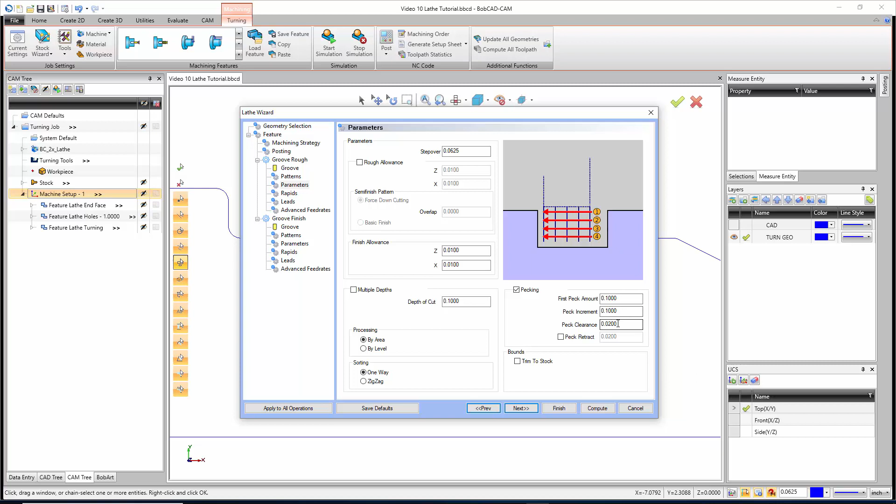Here for the parameters, we have our step over. I'm going to set it to a 50% step over, so just a 1/16 of an inch. Here's how much material we are leaving for the finish pass to clean up. If we wanted to do multiple depths, we could tell it what the depth of cut is per pass. We can also peck our way out with this, so we can actually peck all these grooves in. All we have to define is the first peck amount, the peck increment, and the peck clearance. But I'm not going to peck.

And next, rapids, once again I'm going to use the defaults. Because this is a roughing groove and it's not actually moving along the Z, it's just plunging in X and then moving over in Z, but never inside the part. It's just parallel lead-ins and lead-outs and advanced feeds.

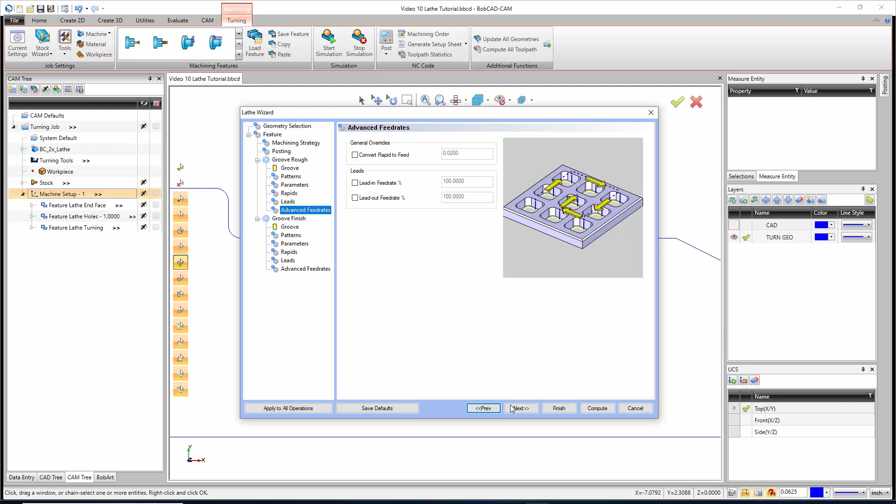No changes. So for the other groove, again, tool number 5, that's the correct tool, that's the one we want. So we'll go next. For the patterns on this we have force down cutting, where we hit the groove from both sides, coming in from the left and the right and kind of meeting in the middle unless we overlap them. Or we could just do a basic finish where we cut in one direction.

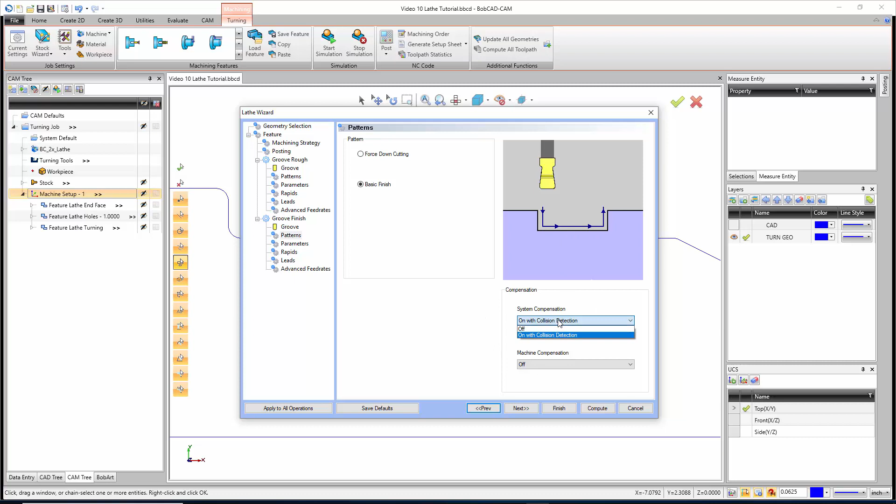Now this one does have system compensation, but it's already on with collision detection. We're just going to tell it to use the tool holder as well. For the parameters, no finish allowance, no corner type change, no trim to stock. Rapids, once again, just use the defaults, leads defaults, and advanced feeds. I'm going to leave them there.

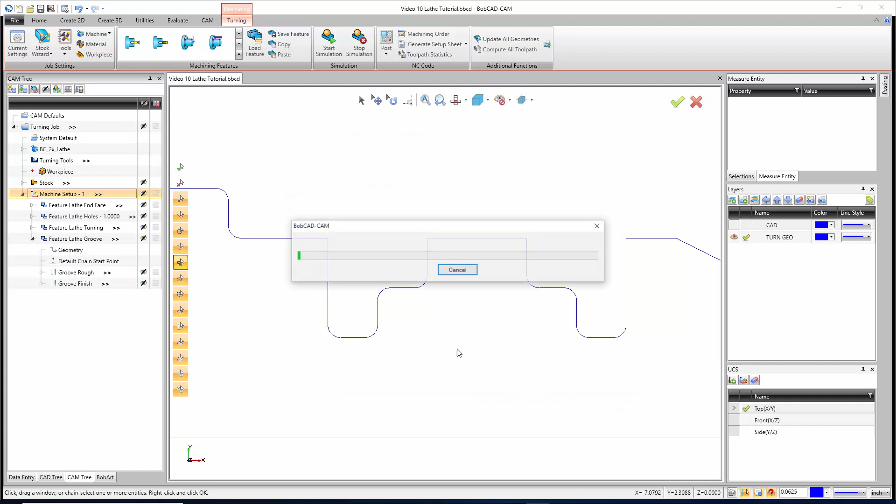So from here we can hit compute, and there is our groove. So there's our groove rough going in and roughing the whole thing out, and then we have our groove finish going in and finishing that.

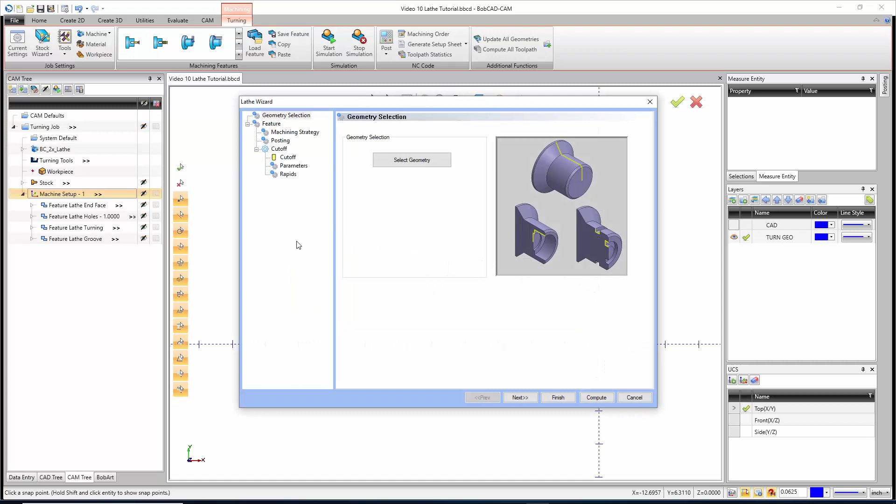So the last thing we now need to do is do a cutoff. We're just going to start by right-clicking on Machine Setup 1, go into Lathe Cutoff. I'll select my geometry, and just like drilling, all we're really doing is picking a point for this. So I can pick that point and then hit OK, so it knows where the back of the part is.

Here's our feature page. So we have our 200 thousandths rapid plane. It's an OD feature. Now, for the constraints on this one, it could be a little bit different.

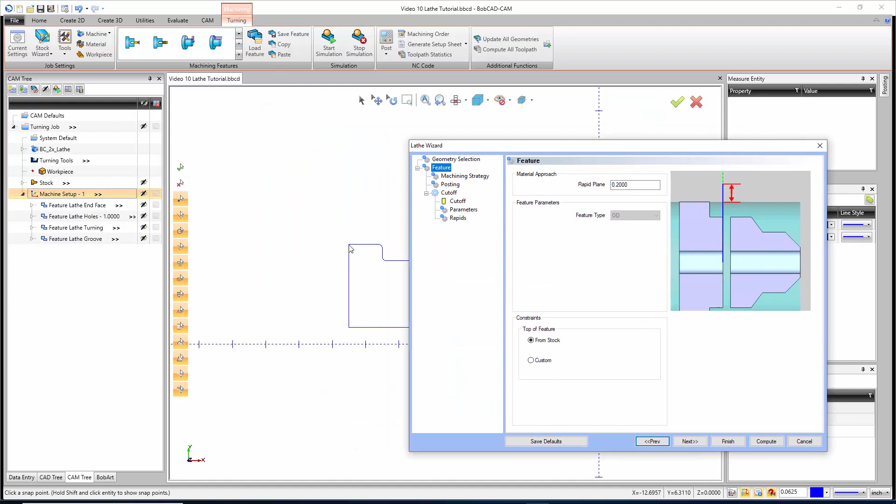Instead of going from the stock, because if you remember, we went and took an extra 1/4 of an inch off after we finished the rough. So we technically have a 1/4 inch extra that's finished to this length here. Now, if I was to say custom, I can actually come in and tell it where to start from. So I can pick that line and hit OK, and now it knows where it needs to come from.

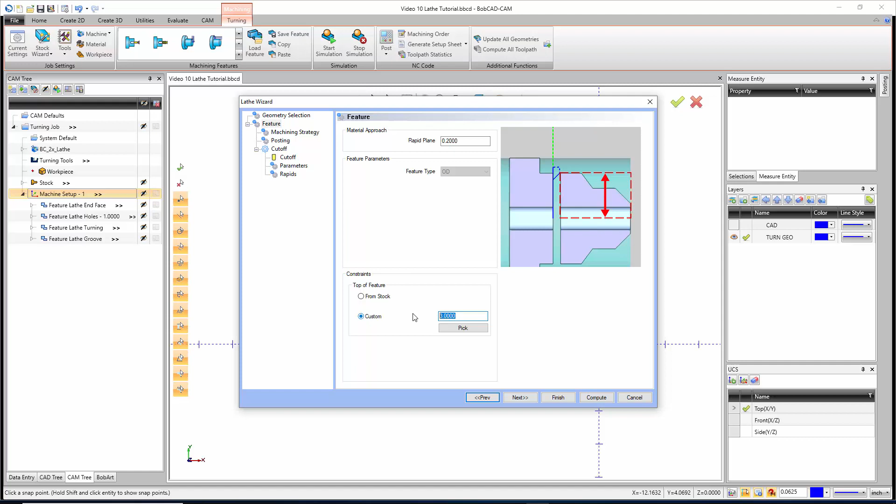Now, we shouldn't have any extra stock anyway because I didn't make the stock any bigger. I'm just going past. If we were to start with a piece of stock that was, instead of 6 inches, 6 1/4, then this would start at 6 inches instead of at the stock diameter. But in this case, the numbers are going to be the same. For the machining strategy, we're just going to do a cutoff. For the posting, you've got separate moves or canned cycles once again.

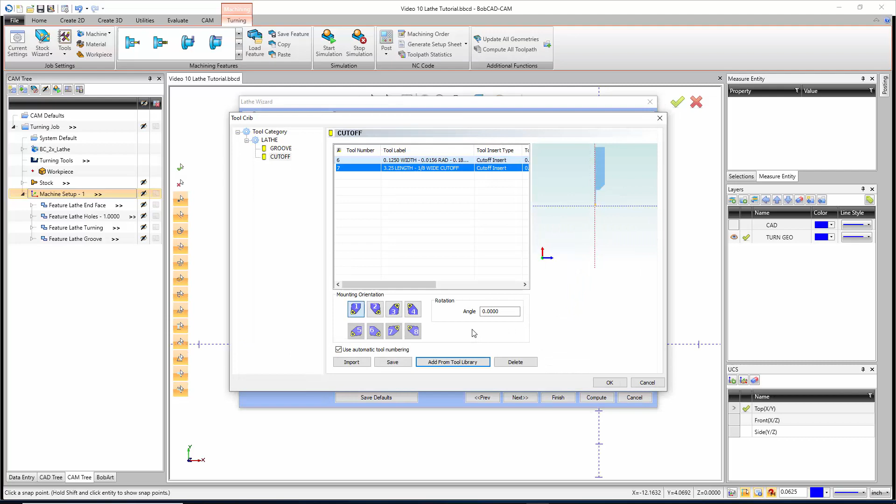For the cutoff itself, if we show the tool holder, we can make sure we get the right tool, which we can see this is way too short. So if I go up to my tool crib and I go over to cutoff, I could say add from the tool library, and we'll see we have this 3 1/4 inch cutoff tool. So it's a lot longer. So I'll hit OK. That's the tool we want. And so we'll hit OK again. And there it is. Next, we have our parameters.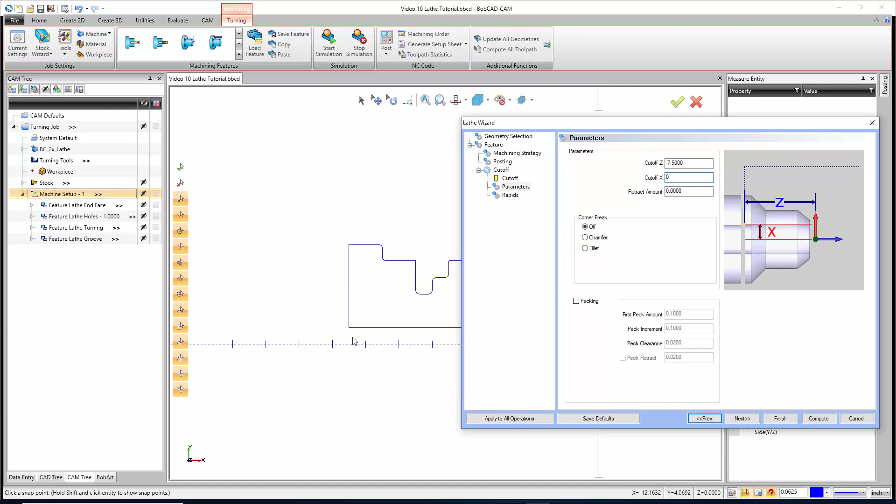So it knows what distance back in Z we want to cut off, which is at 7.5 inches. But we'll see right here for the X, it's stopping a little early. It's not going all the way down. And so what we can do with this is we can actually set this to 0 so that it cuts all the way down to the center. But remember, we do have a hole, so this is going to come off as soon as we hit that point right there. We could choose to give it a corner break as well.

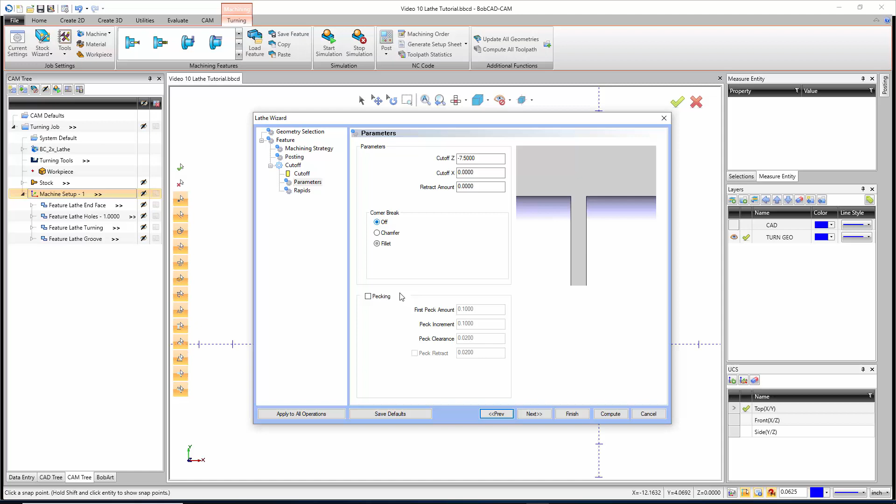Right now it's turned off, and according to the part, it is a sharp corner on the back. But we could tell it to chamfer the corner. We could define the length of it as well as the angle. And we have our fillet option as well. I'm not going to run either of those. We could also use this for pecking. But again, no pecking, so we'll go next. And the rapids, just going to use the defaults. So we can hit compute, and there is our cutoff.

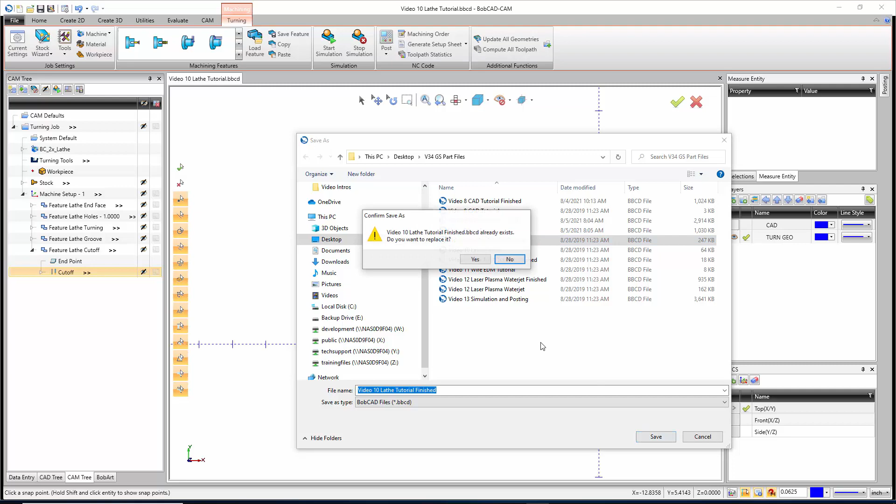So now that we're all done, the best thing to do is save. So I'm going to do a save as. I'm going to save as that part there and say save. Yes, replace it. And now we can go ahead and check it out inside the simulation. So we'll go up and hit start simulation. And when the simulation loads, I like to set it to a front view and then set your speed so it's not going too fast. The lathe does run fairly quickly through the simulation here.

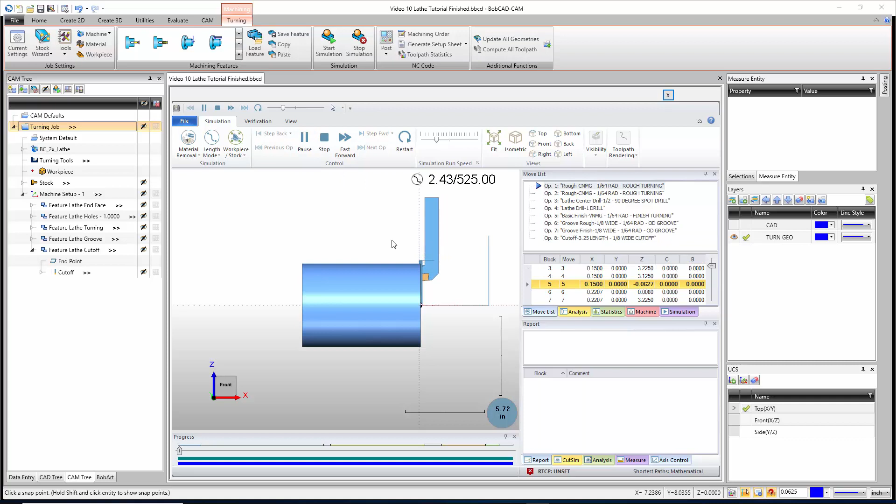So I'll go ahead and say run, and it's going to face off the part. And if we want to turn off the tool path, we can go to visibility and turn off the path so we don't have to see it at all. We'll see it's just going to turn this down. I'll speed it up just a little. There's our rough. There's our drill. There's our finish. And then we have our finish for the groove. And then there is our cutoff. So there's our full part.

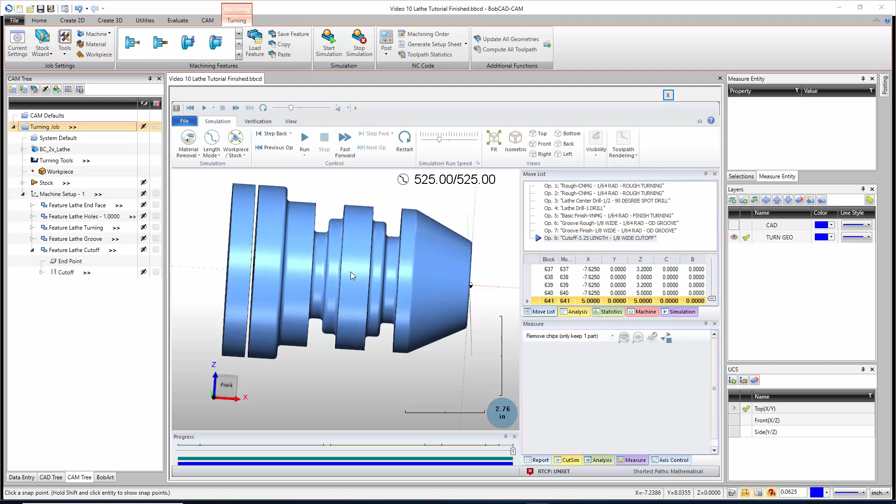And now what we can do, if we want to get rid of this back piece that's sitting here so we could really look at the full part, we could actually go to the measure tab, change it from points to remove chips, only keep one part. And then we're going to click on our model, but we're going to click with our middle mouse wheel like it's a button. And it's going to remove the excess geometry that's no longer connected to the stock. And there we have it. When we're all done, we can close out of the simulation.

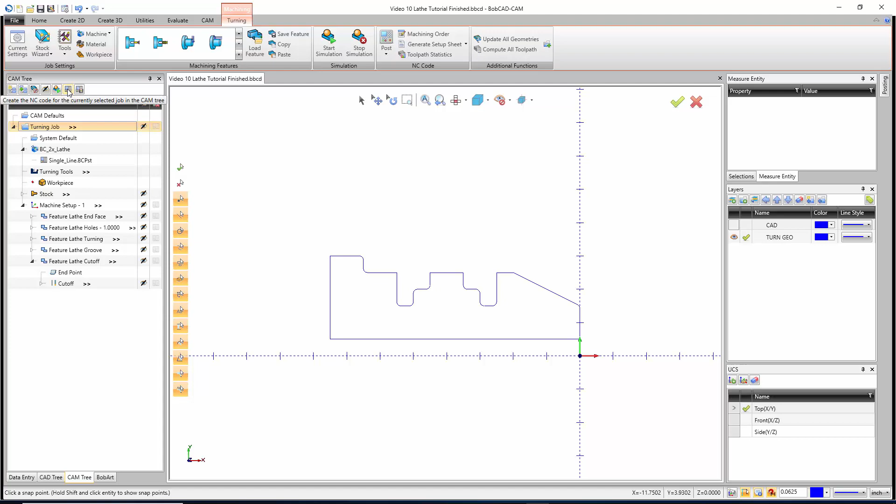And then the biggest thing is make sure you have the correct post processor here, because that's going to control everything, especially the canned cycles. And then right up here, we can hit the post option, or this little button here, or the big button up top that says post, and the code is going to show up there. From here, we can right click and say save as and save it, bring it out to the machine, or we could bring it to the NC editor to make changes to it if needed, and then resave it, or send it to the machine via RS-232.

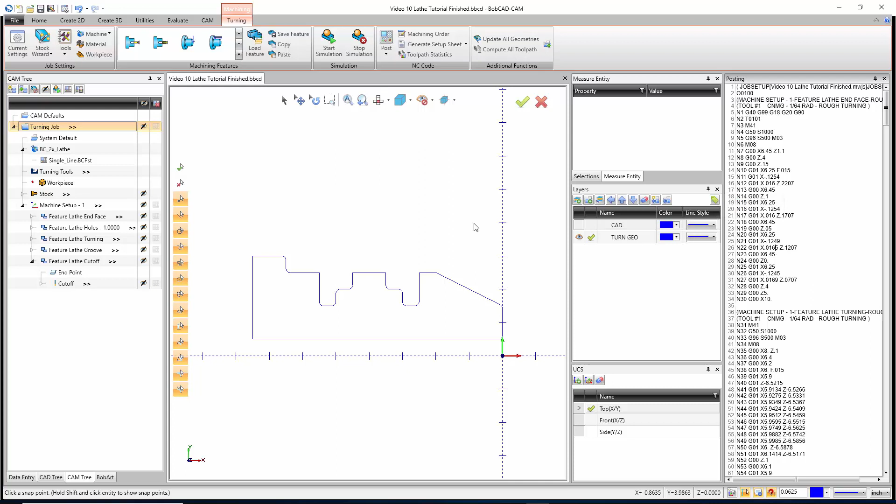And that concludes the video on the lathe tutorial from inside of BobCAD-CAM.